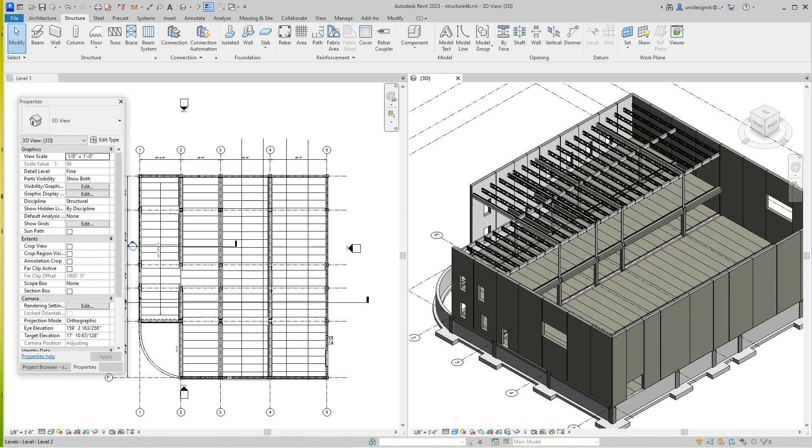This is an advanced class, if you know. Anyway, but this is how you go.

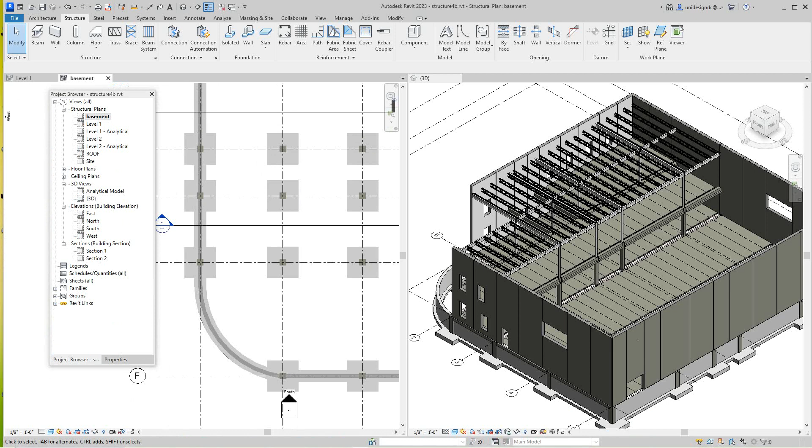So basically we need our base plates connected here. I'm going to go into my project browser, go to the basement, here in our basement level, okay, I'm going to go to level 1 now. I got a plate here, and I'm going to look at this in wireframe, just so we can see what's happening.

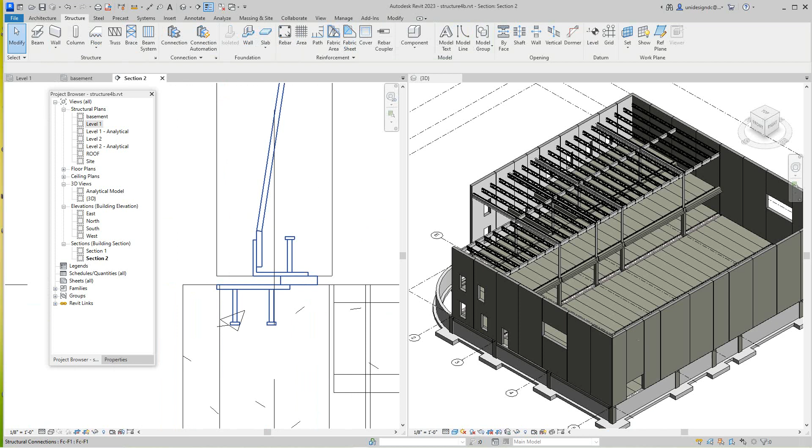So here's our plate, and this guy needs to go probably here. This is the connection between the wall and the floor. Let's pull this section back and have a quick look. That looks like it's going to be okay. So what's happening here, you have a plate, I might want to move this over a bit. You have this plate here, and it should be centered. We got a piece of bar here. Let's look at this in shaded view if we can. We can't really see it, but this is what's happening: you got a base plate, a shim, and this sort of connection here for this piece.

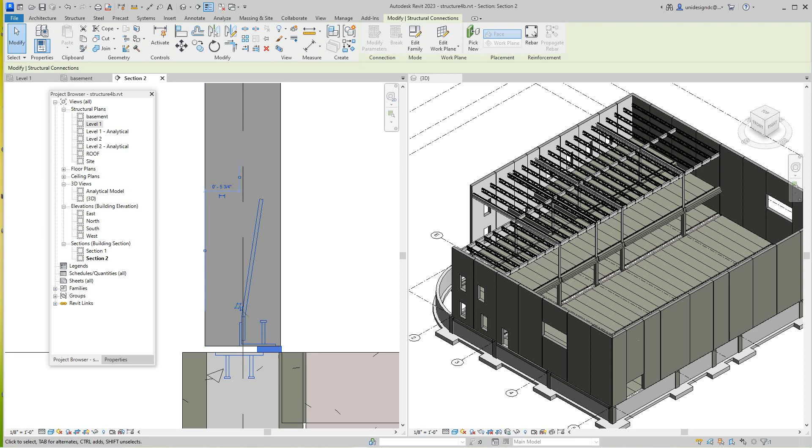Let's go back to level 1. So basically what happens is you have to make these connections throughout the panels. I think maybe most of the time it's 2, so I'm going to copy this about right there, and then another here, at least another 2 feet across. They're standard widths and lengths, maybe even 3'6". This is kind of a standard thing depending on where you are in the world.

I'm just going to go here with this. We got to just place this here because we got a column here. So you get the idea, you just go and place these connections throughout the project, and so on and so forth. I'm going to go with this one here and one here. I got an issue with the columns, but I really don't think we need columns in this.

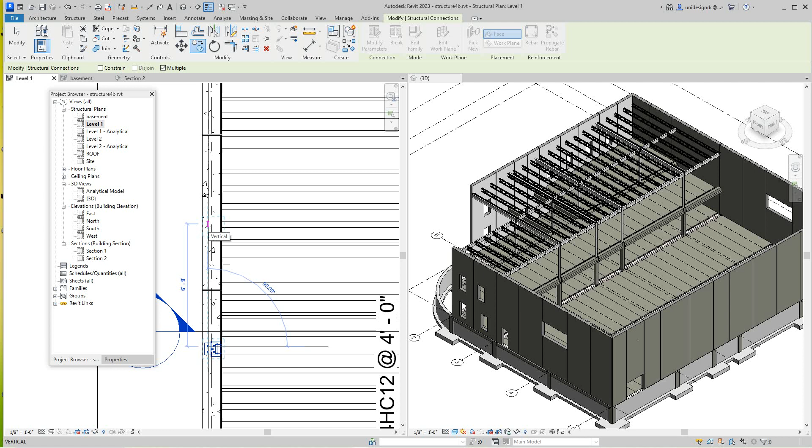So sorry folks, I just wanted to show this video on connections. So we have some connections in here. Now let's go have a look at our elevations.

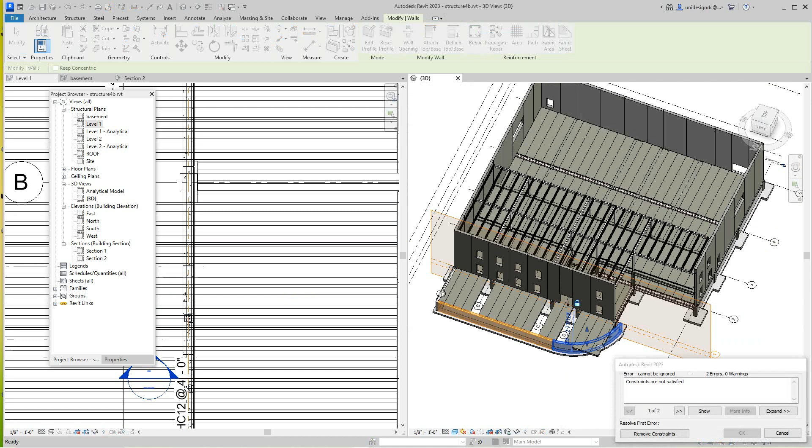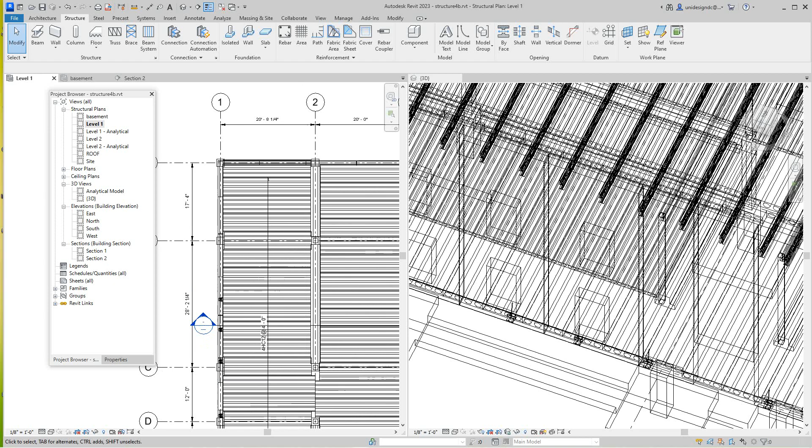I'm going to show you this in the 3D view, what's going on here, if I can. So we're going to look in the 3D view. And these are our... cancel that, sorry. This is out of here. So if I look at this in wireframe here, this is what we get. There's our connections, but we really have to go through these and sort these out properly because we don't really have a static or a concrete area where everything's going to be. But this is how you connect the panels to the walls. If you look at that in section, that's what's happening right about here, yep.

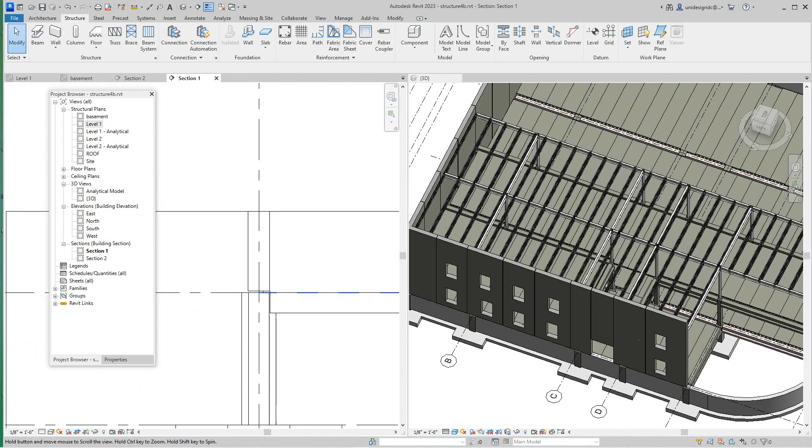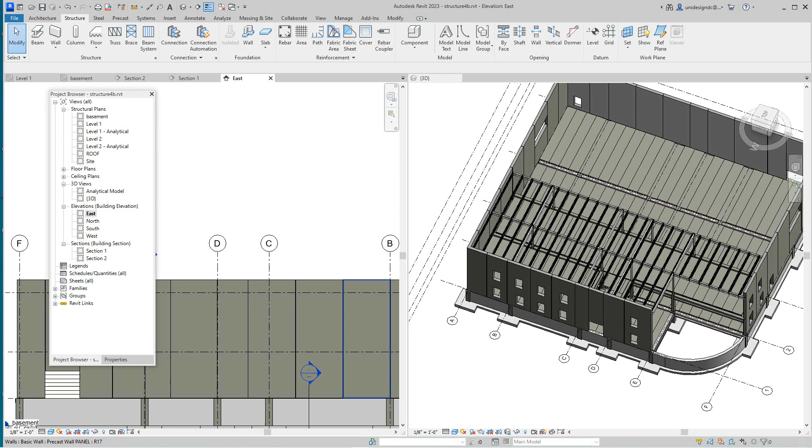Okay, so I'm going to lay this out. Now another thing I want to show you here briefly, I don't know if we got time, but we're going to show you this briefly. Let's go look at our east elevation here. We have to connect the panels, basically they're not just standing there. Of course, we have to do the base plates, and then we have to do the panels.

So here, I'm going to go into my properties. I'm going to insert component. Oh sorry, it's one of the properties here. Yeah, nope. So anyway, properties here, I'm going to insert. Sorry. Load family, architecture, component, place component, property. Okay, here we go, wow, so I didn't know that.

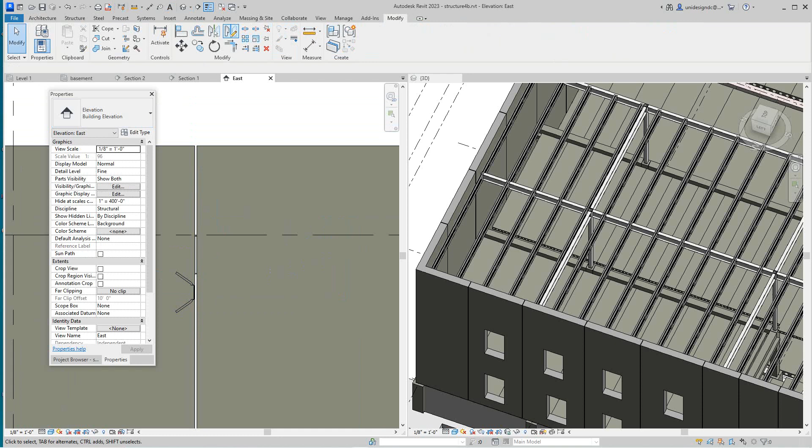So here we've got several families, so we're going to go to the mini V connector. That's what they use with Precast to connect the wall panels together. So I'm going to go and grab this guy, mini V, and place it right about here. And then I'm going to do another one here, mirror it I guess, and go here, here. I don't have it at the exact center, but okay, so you get the message.

So what I'm going to do, folks, is lay this all out. You get the idea, I'll do a few more just so you can understand and follow along. Uh-oh, cancel that, I don't want to do that. So I'm going to go modify align here, there. Okay, and then I want to just select this guy here, and I want to cheat here and make this really simple.

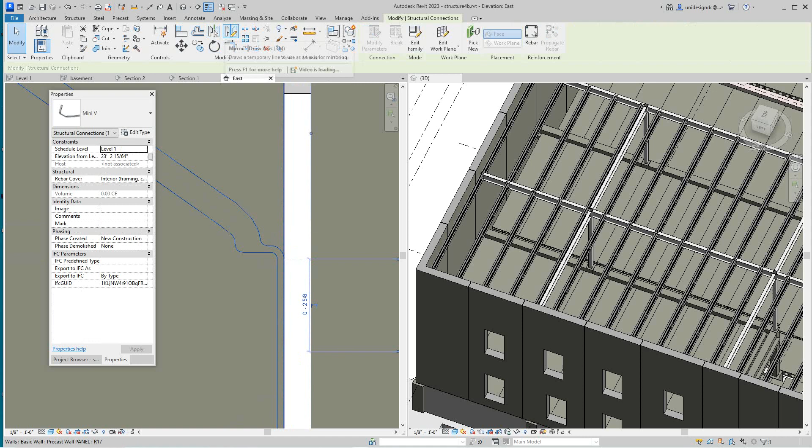I'm going to go in here, go to my architect, annotate tab, and just draw a line here, a detail line from here to here. And I'm going to take this guy and copy it from this point, and there we go. So these are V connectors, these are what we use to connect the wall panels. We got to do a few more extra things in here because this is called a gravity wall.

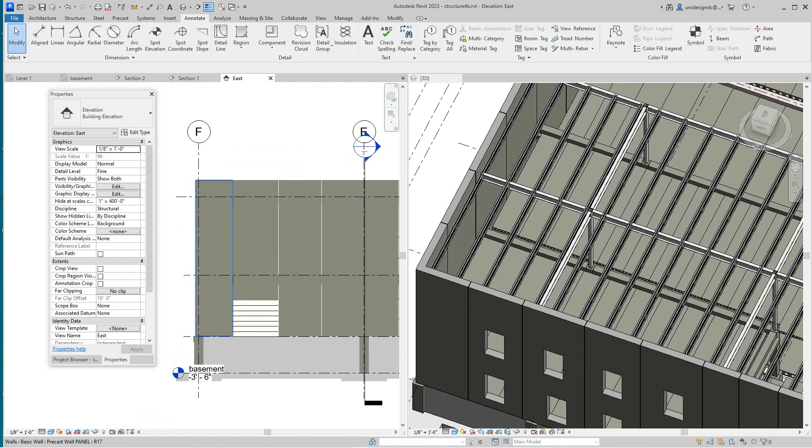Now we'll look at a gravity wall later, but for now we want to use these connectors, and we're going to just go here and copy this guy over. So we can copy.

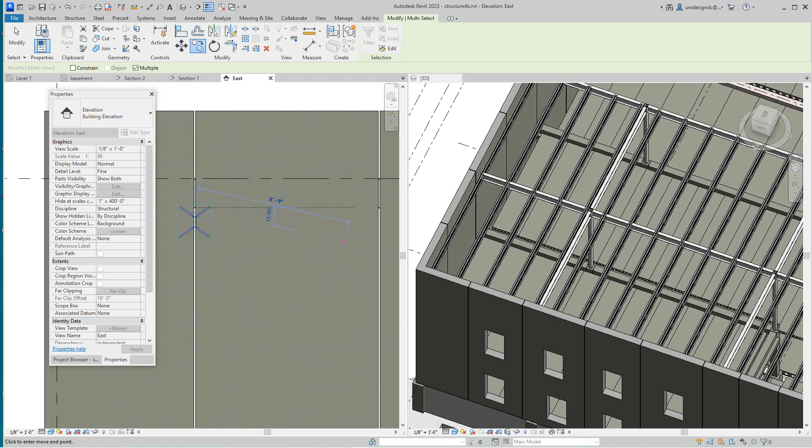So what I'm going to do, folks, I'm going to leave it there, bring it back another video, and I'm going to have this all zipped up and wrapped up and everything so we can move on.